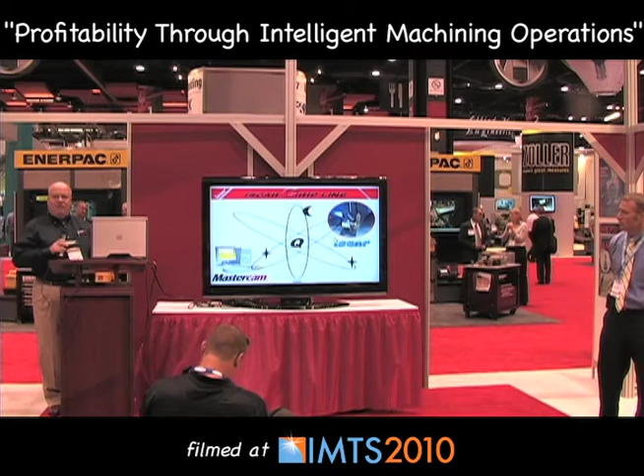It's not often that you'll have an applications engineer from ISCAR by your side when you're doing the programming, or an applications engineer from Mastercam by your side when you're doing the programming, and even rarer that you'll have both of them on either side of you to take advantage of both their technologies. So the result of this partnership is we've taken the technology that ISCAR provides and enhanced the technology that Mastercam provides to take advantage of the tooling.

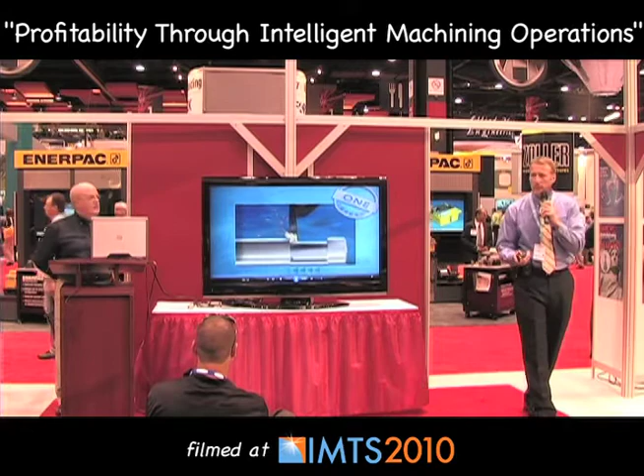I'm going to narrate while this video plays in the background. Something ISCAR developed in the mid-1980s was the ability to groove and turn with what you might typically view as a grooving tool. This technology hasn't been utilized to its fullest potential, and the big bottleneck has been programming. Most of the programming of this type of tool motion is done by hand. So it's a bottleneck, and we needed to address it.

One of the things we did was approach Mastercam and say, can you take our rules of engagement, how we want to apply the tool, and create an automated way of programming this tool in your system? And they took that project on, and I think you'll see an example later on how they've done that very well.

What you just saw in the previous video was kind of like a rough and finish type motion, and what you're seeing here is a near net shaped part, a camshaft, where we just need to apply the finishing principles of the groove turn motion to finish the part.

Okay, so to get started with groove turn, programmers need a basic understanding of our grip lines. What products do we have that apply to groove turn programming? The grip applications - you're sitting here going, okay, what is it? Turning. It's turning. You've seen that, and we can perform external, face, and internal groove turn operations with our tools.

And grip programming, I told you there's some rules of engagement, and what you saw on the screen, there's some little intricate moves. You've got to pay attention to detail to get the most out of this programming.

So with grip lines, I mentioned that this is something we created a long time ago. We started out in the early 1970s with Selfgrip, and we moved on through, and in 1985 - you'll see I've highlighted this - Heligrip, or Cutgrip, came out with the ability to groove and turn. So since 1985, 25 years, we've had this ability.

But it's never been easy to program, or there's never been a robust CAM software to address the programming needs. As I told you before, the applications are external, face, and internal. There's some things you need to know - make sure you pick a tool that's capable of what you're looking for.

And to get started, you need to get to know the icons. If you look in our catalogs, there's going to be icons that call out parting, groove turn, threading, and grooving turn with a full profile, round insert.

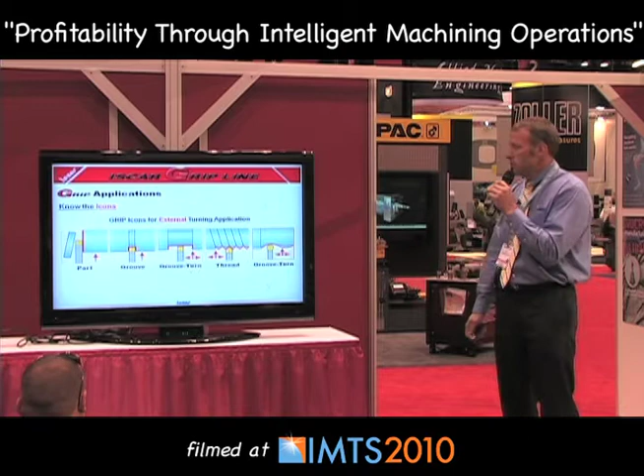This is a grip icon for an external turning application. These grip icons cover the internal. You can see they've changed a little bit, but the basic idea is we've got icons that call out what that tool is capable of.

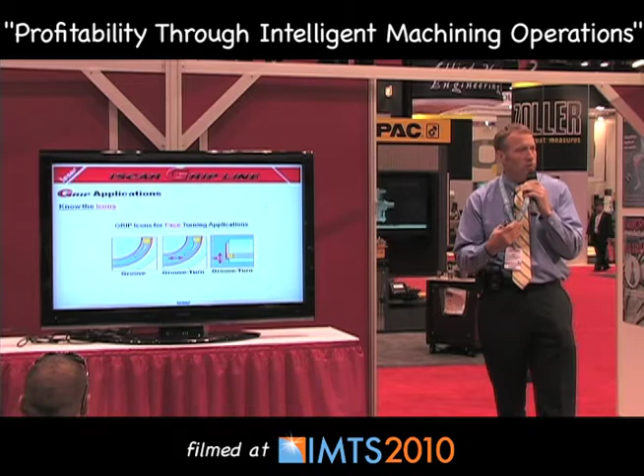And then for face turning, another set of tools to cover the face turning applications. So what are we looking for? We're looking for the icons for groove turn that show you've got multi-directional capabilities.

There are some programming techniques that need to be taken into consideration. When that tool engages the material, the first motion is a grooving motion. The feed and speed will be reduced compared to the turning motion. But the first thing you do when you groove is you have to back away from the part.

We recommend 8/1000ths, and then you start the side turning motion. What happens is the side turning creates deflection. So when you get to the end of that cut, you need to vector away from the part rather than come straight out, or you'll drag the insert out, or potentially drag the insert out of the pocket.

And then you would continue that motion, so on and so forth, until you roughed out between the walls or the groove.

Now when you get to the finishing motion, you can see we have a very specific set. We want to finish to the diameter, then come back up and approach the vertical walls. Covering the finishing again here: groove to final diameter, pull back the tool, and then what we have is what we call a delta move.

I mentioned the tool deflection the insert undergoes when it gets into a side motion, and this needs to be taken into consideration. It's usually maybe between 5/10ths and 2/1000ths, depending on the width of insert and the material you're engaging, but it needs to be taken into consideration.

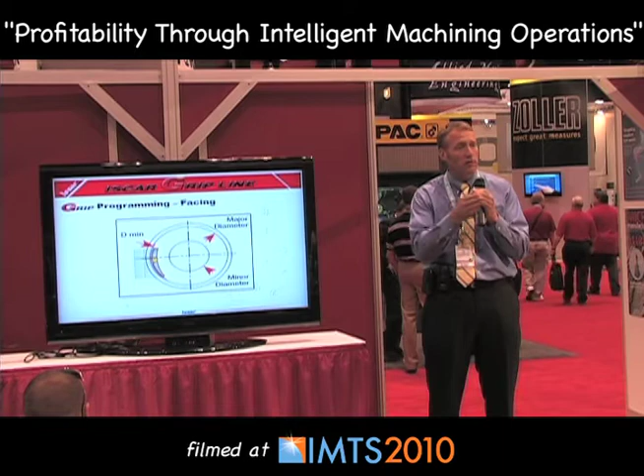We'll give you recommendations, it's kind of simple: the maximum programming feed and depth of cut. You can look at the maximum depth of cut - it's the width times 0.65 of the insert. And with the feed, it's the width times 0.075. So it's simple calculations to come up with your depth of cut and your feed rates.

Now I mentioned the tool tilting, and this picture right here kind of simulates that. What we need to do when we're finishing is make sure we're leaving enough material, and make sure we're feeding at a feed rate that's enough to create that tool deflection. This chart here kind of gives you some ideas what you need to do through the range of inserts.

Why should you care? What are the benefits? This is a system designed to eliminate tooling. That simple video I showed you in the beginning, you might use 3 tools to do that - maybe one rougher to do the rough groove, and then you'd come in with a right and left hand tool to finish the sidewalls. We can do that whole process with one tool.

Increased utilization. If you notice that zigzag motion, you're using 3 edges of that insert - it's got 3 sides to it. Typically we have users that only groove, so they only ever use the face of the insert. If you remove the material using 3 edges, you're increasing your tool life.

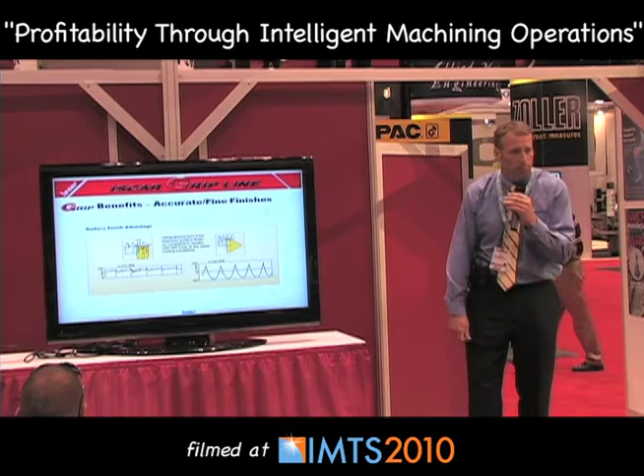All right, so I'm going to pass it on over to Steve, and he's going to show you how we've made the programming easy. What I'm going to do is demonstrate how this programming is done inside of Mastercam.

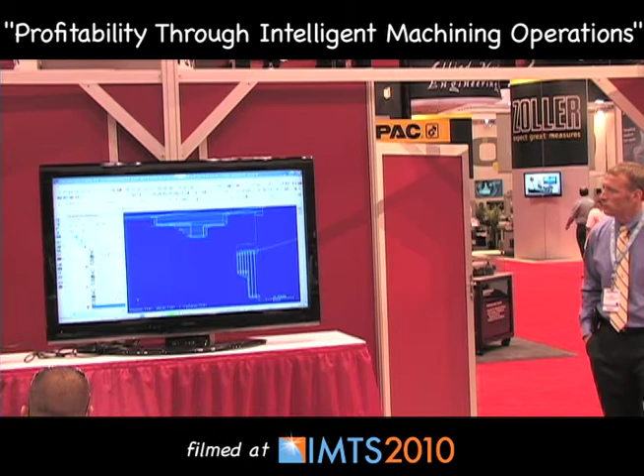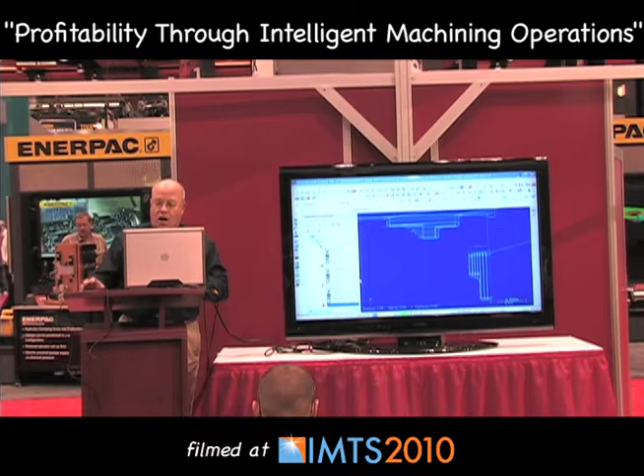As I stated earlier, what we're bringing to the table is the experience, the knowledge that the ISCAR tool brings to the customer. As Tom indicated before, this tool's been around for quite some time, but the difficulty in using it was the programming, taking into consideration that back off amount and using the tool appropriately so you can maximize the productivity gains this tool can give you.

Actually, what I'm going to do is go to my plunge and turn. If I go to the parameters, there's an actual plunge turn option inside of Mastercam. And then I will select the appropriate ISCAR tooling.

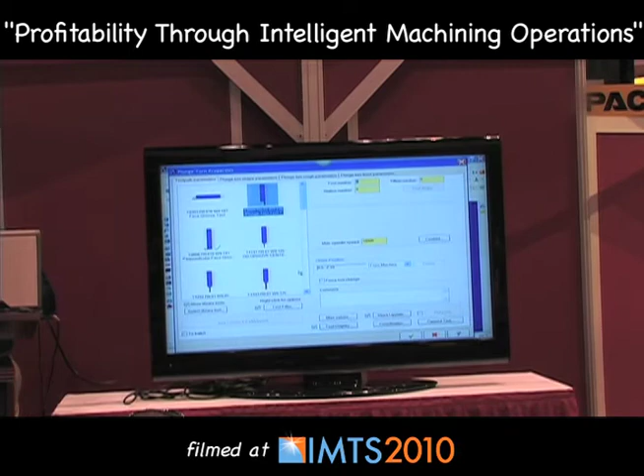If you're a Mastercam user, you're going to recognize many of these dialog boxes right off the bat, in particular your entrances and your exits. But this is a new tab, and these are the plunge turn parameters, although there are many similar functions as far as stock to leave in both X and Z.

The one thing that's important to understand is that for roughing, there are certain methods as to how you enter the part. Again, Tom was mentioning how you can go back and forth, you can zigzag and cut through to rough the part. If we go to the last tab, the finishing tab, the important number we need to pay attention to, to take advantage of this tool...

...is what we call the tool deflection back off, or as Tom puts it, the delta move. This information you would get from your ISCAR catalog, and based on the material and the amount of stock you're leaving, you'll put the appropriate number in here, and then go ahead and calculate the tool path.

So let's just take a look at what this tool path looks like. First I'm going to regenerate it because I made a change there. So I've recalculated this tool path live.

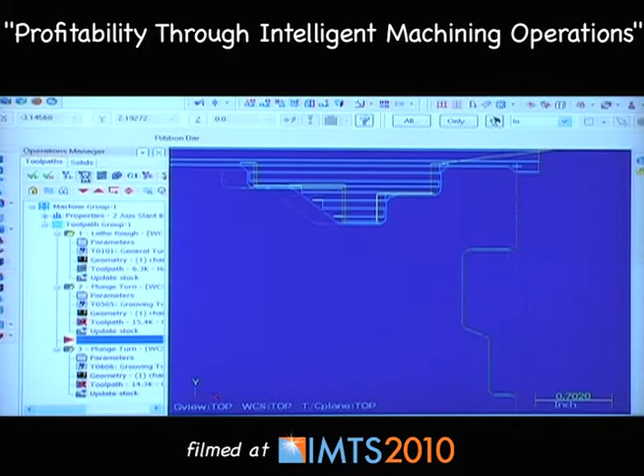And now I'm going to do something called a back plot. What back plot allows me to do is take a look at this, and I'm going to step it through one step at a time so you can see the stock. Let's just zoom up on the area we want to take into consideration here. Now let's just step it through, and you can see the tool.

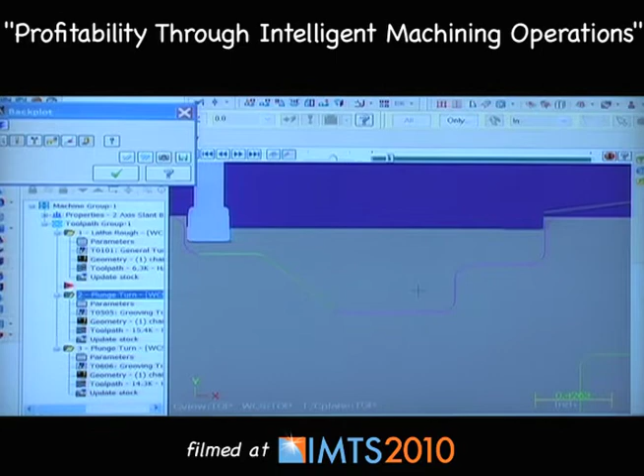Did you notice that little retraction right there? It's not just a straight motion, it's actually going at 45 degrees. I'll continue to step through, so the tool's being used the way it was designed to be used, and I think that's the critical differentiator we bring to the table here, that we can really take advantage of what the tool does.

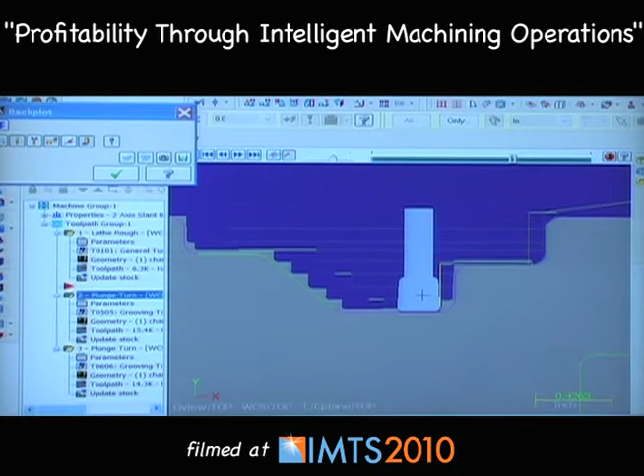I can see we're going to come back, clean up all the plateaus, and finally come down the sides. Notice that back off amount? Let me zoom in here.

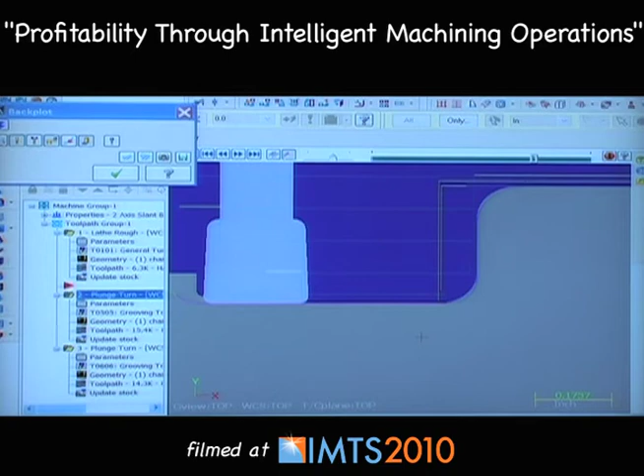Come back, I'm going to step it through, and you'll notice there's that back off amount, a very small motion to clean off that floor. So as you can see, one tool does this entire form very efficiently, one operation, one tool, and finished.

Tom asked me to show how some of the parameters are built in to perhaps use this tool more appropriately or safely. So we put in some checks here, for instance, stock to leave. The trick here is ISCAR recommends the stock be larger than the corner radius of the tool. So what would happen if I change this? Let's make it a little bit smaller.

Mastercam has a check here. Although I can override this, the intelligence is built in to say, oh, you're not using this tool appropriately, you're not going to get the results you need. So we built in these safety measures, and they're throughout the entire interface, so this tool gets used appropriately.

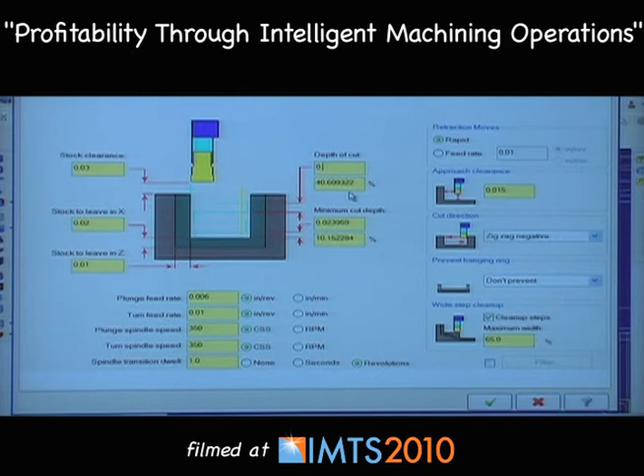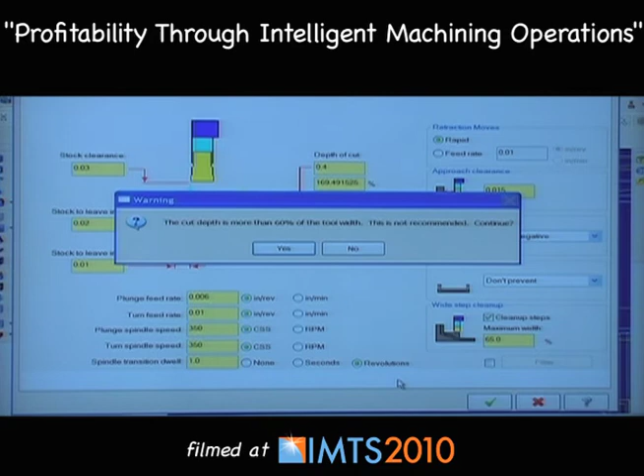Let's say if I make my depth of cut more than what ISCAR recommends — here's the rule of thumb: more than 60% of tool width, ISCAR recommends you don't exceed that. So again, we're ensuring a fail-safe approach to programming this tool correctly so you get the best results.

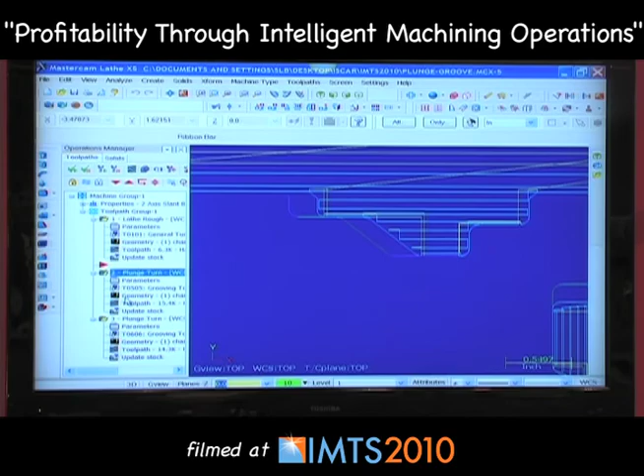So again, if you're a Mastercam user, many of these controls are familiar to you. The only difference specifically is with the plunge groove tooling, and it's only enabled when you use the ISCAR tool.